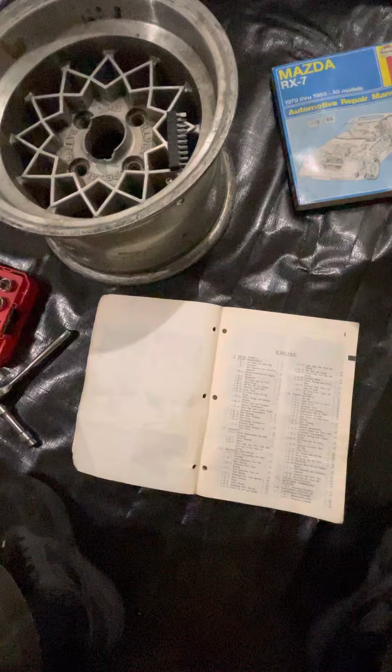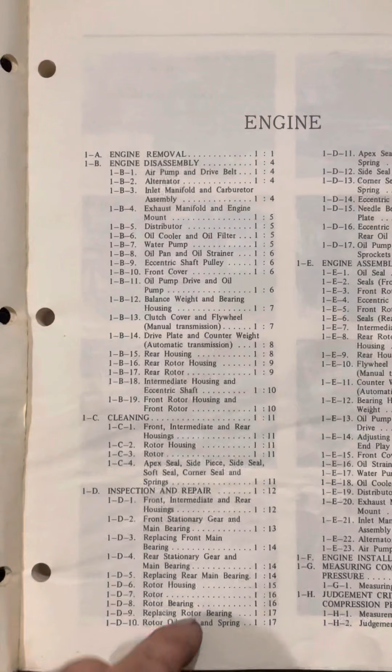I've got my RX7 '83 model, the actual '83 workshop manual from Mazda. Just doing this on a shitty ass iPhone. It gives you the two different things for engine removal.

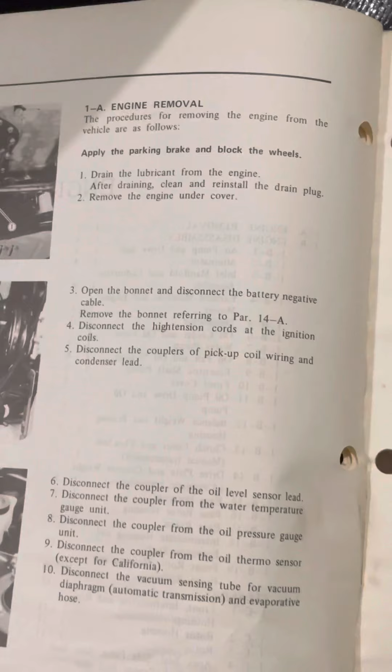Engine removal procedures: apply the parking brake, block the wheels, drain the lubricant from the engine. After draining, clean and reinstall the drain plug. Remove the engine undercover, which is the splash shield essentially.

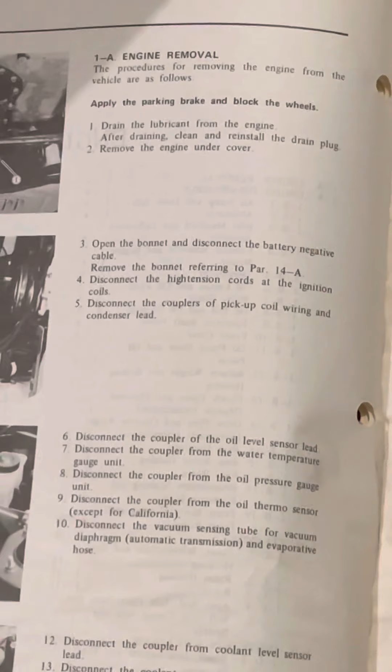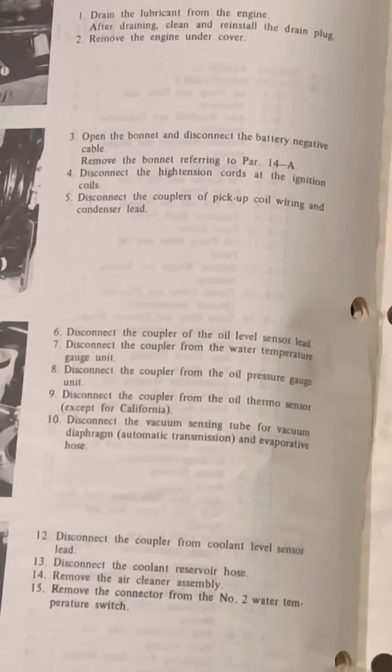Open the bonnet, which is the hood, and disconnect the battery negative cable. Remove the bonnet, referring to paragraph 14A. Disconnect the high tension cords at the ignition coils. Disconnect the coupler of the pickup coil wiring condenser lead. Disconnect the coupler of the oil level sensor.

Disconnect basically everything. And then I'll show you here the pictures, like that.

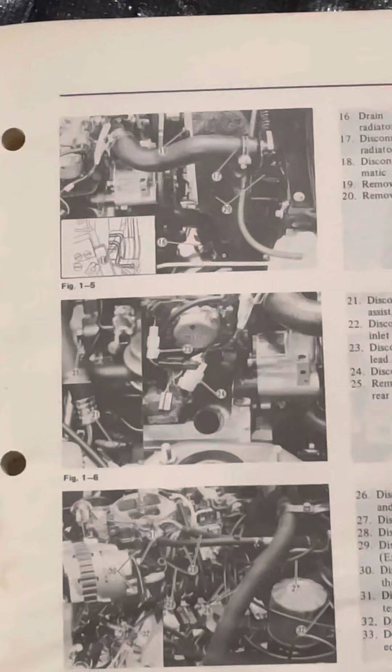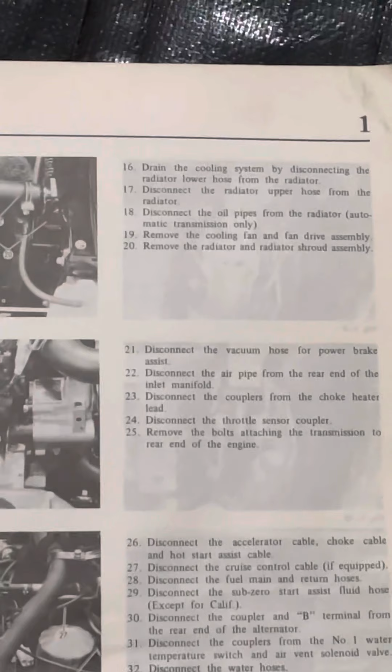Let's disconnect, demount the air conditioning compressor if equipped, jack up the vehicle and support it with stands, disconnect the wiring and remove the starting motor, remove the bolts attaching the transmission to the rear end of the engine.

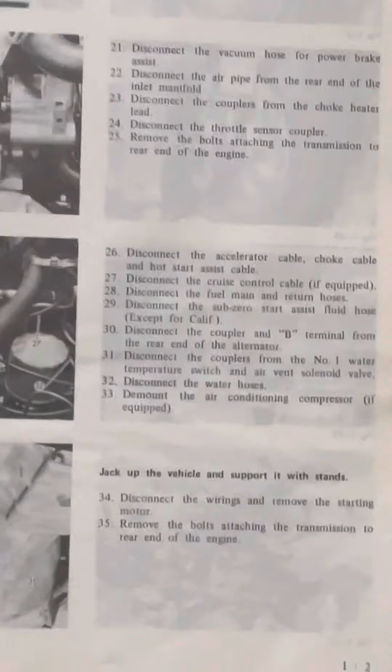And pretty much that's where I'm at with this. And it shows...

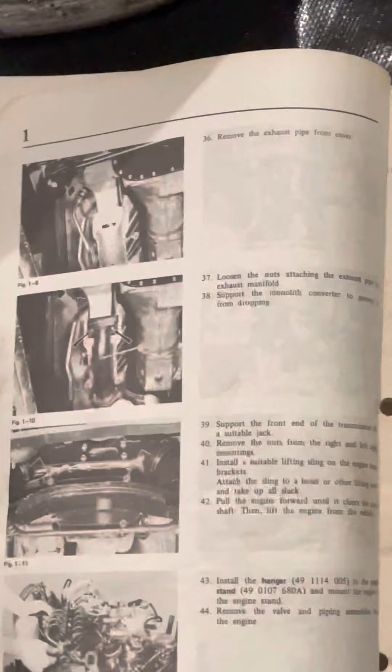Remove the exhaust pipe front cover. Oh, hold on. Loosen nuts. Support the front end of the transmission with a suitable jack.

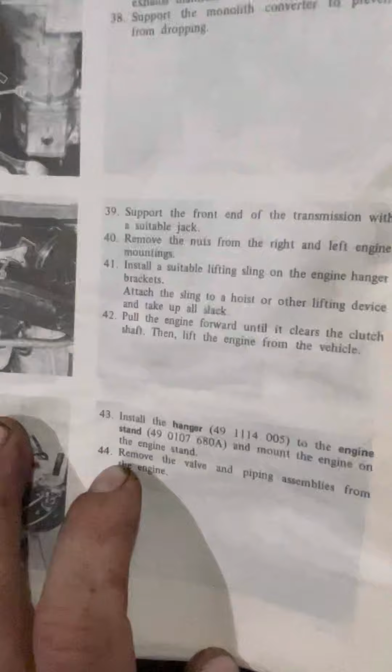Install the hanger to the engine stand. Giving you part numbers that don't mount this shit no more. And then mount the engine on the engine stand.

Remove the valve and piping assemblies from the engine. So basically your rat's nest.

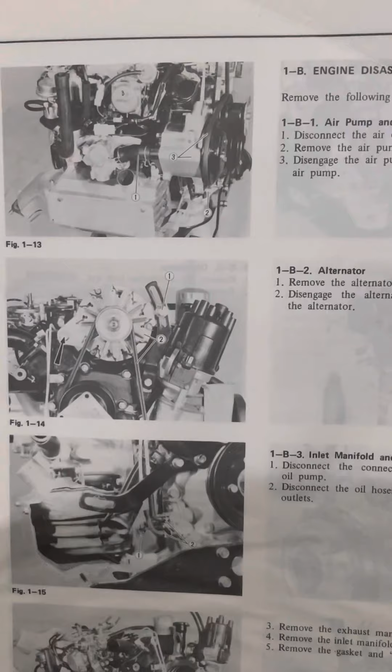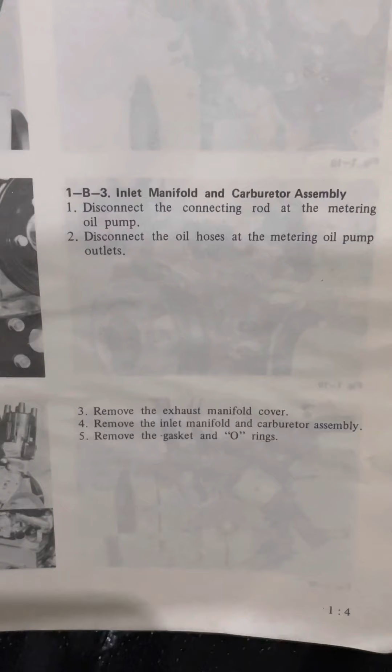Then your air pump, alternator, inlet manifold and carburetor assembly next. Remove the exhaust manifold cover, remove the inlet manifold and the carburetor assembly, remove the gasket and O-rings. Basically get all the shit hanging off the sides of it off, is what they're saying.

Exhaust manifold and engine mount. The distributor: remove the distributor lock nut, remove the distributor, that's pretty fucking easy.

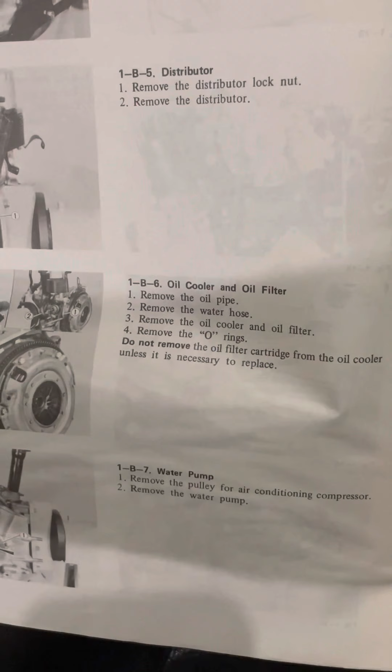Oil cooler and oil filter: remove the oil pipe, water hose, oil cooler and oil filters, remove the O-rings. Do not remove the oil filter cartridge from the oil cooler unless it's necessary to replace. Not a big deal.

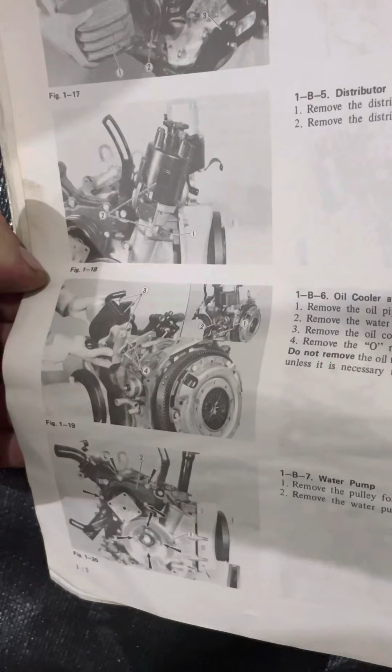Water pump: remove the pulley for air conditioning compressor, remove the water pump. This one assumes basically you're a competent mechanic. It says oil pan and oil strainer: remove the oil pan, remove the oil strainer and gasket.

To remove the oil pan, slowly drive the scraper, blah blah blah blah blah blah. Engine shaft, eccentric shaft pulley.

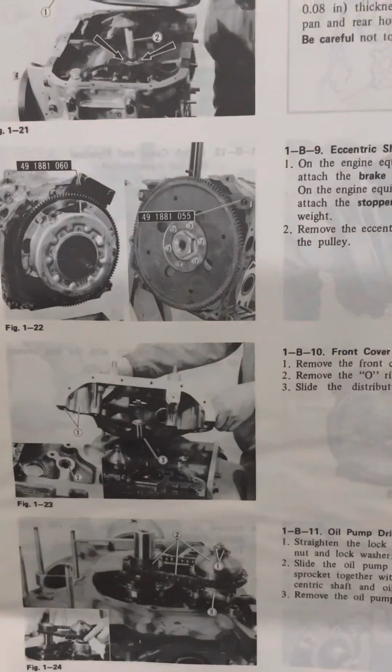You got to get a stopper for it. It shows you another way to stop it, because that's the flex plate version. The other one's a manual transmission. Then you remove the front cover.

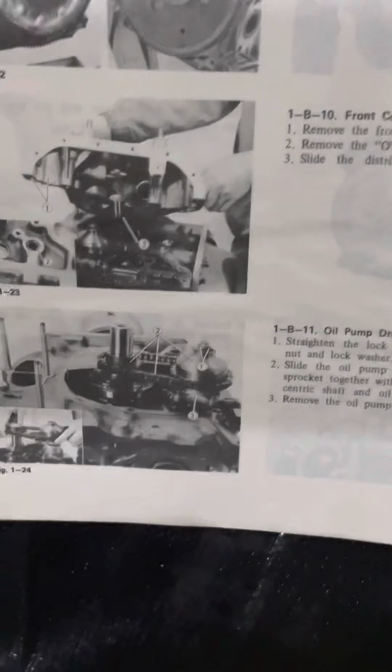So and so and so and so. Yep, I'm not gonna go through all this. I'll just kind of go through it with the video.

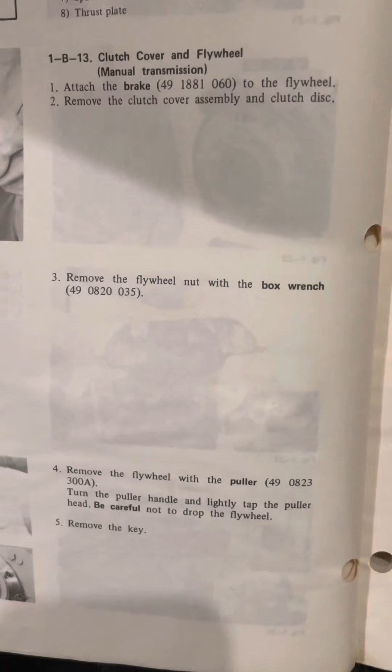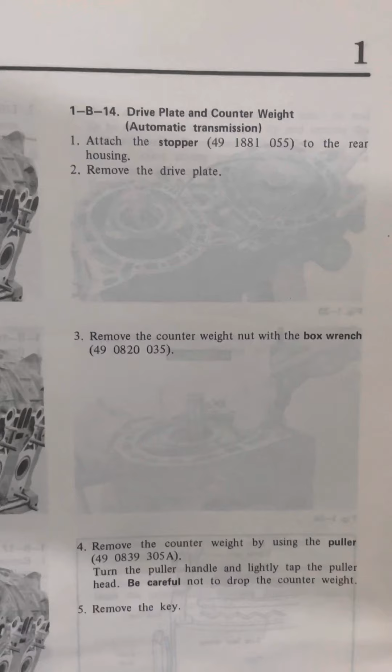If you want to pause, that way you can understand the manual if you're ever to do one of these yourself. It refers to part numbers that don't really exist anymore, because these are, you know, 40-year-old vehicles, before the internet was even around really.

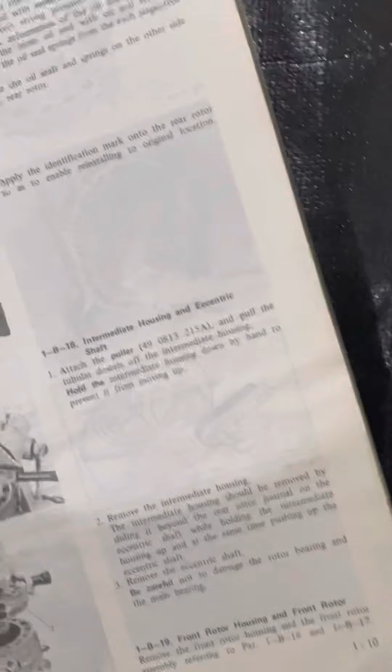Talking about rear counterweights, giving you the almighty pattern that you should follow. Then imagine nobody ever follows it to disassemble. I don't think it makes a difference, but I'm not an expert.

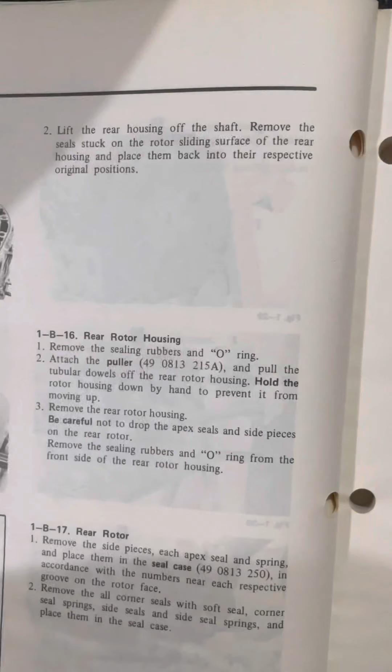Lift the rear housing off the shaft, remove the seals stuck on the rotor sliding surface of the rear housing, and replace them back onto the respective original positions. So remove the rear rotor housing, remove the sealing with the puller.

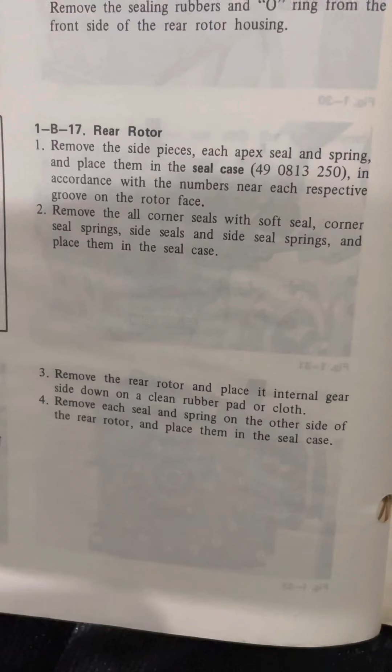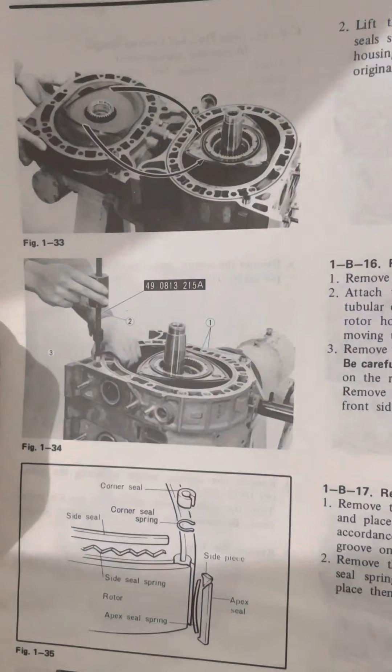Seal case, which we don't have that. See, that's a seal case, basically just a box. But you could make that up or make that somehow, figure it out.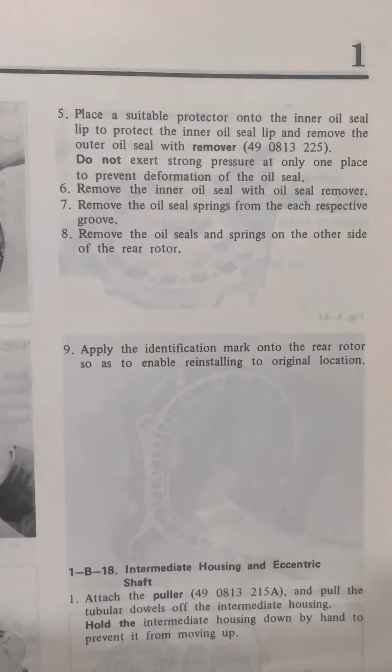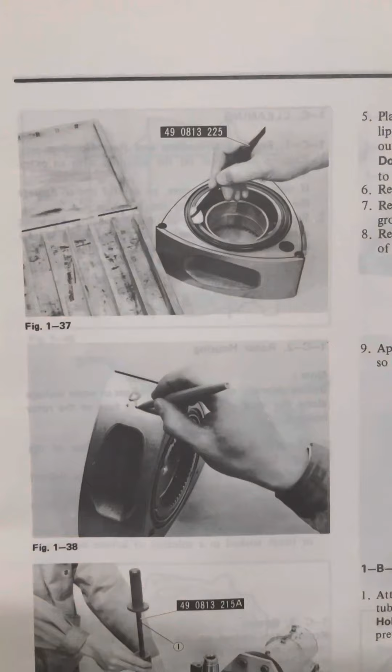Mark the rear and front.

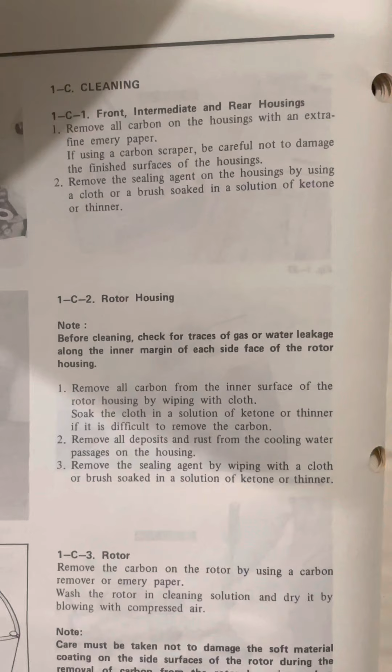Cleaning it for reassembly. Inspection and repair.

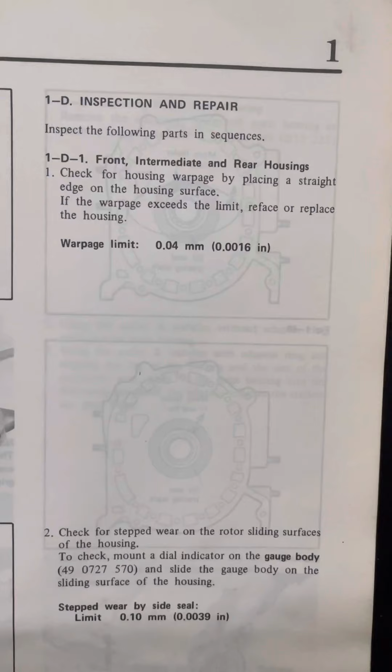Inspection and repair: inspect the following parts in sequence - front housing, rear housing, check housing for warpage, straight edge with the housing surface. If the warpage exceeds the limit, reface or replace the housing.

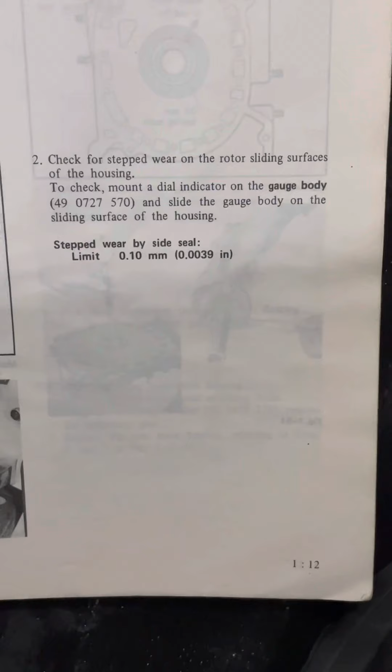Most likely you're going to reface. I don't think you're going to get a new housing, they're too expensive. Refacing is $150 or so. New rotor plates are like $200 at the bare minimum for used ones that still need refaced.

It's kind of telling you, showing you how it's done. Giving you a magnetic base to check the step wear.

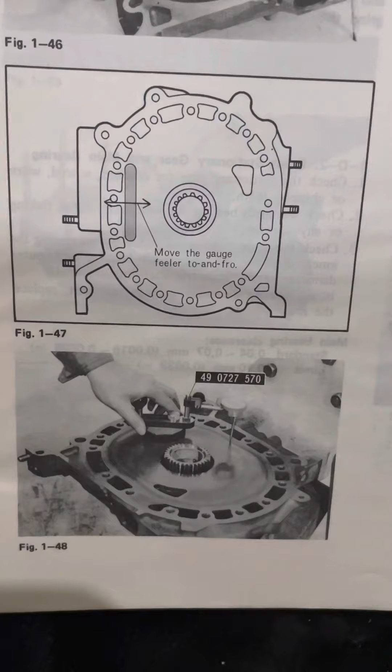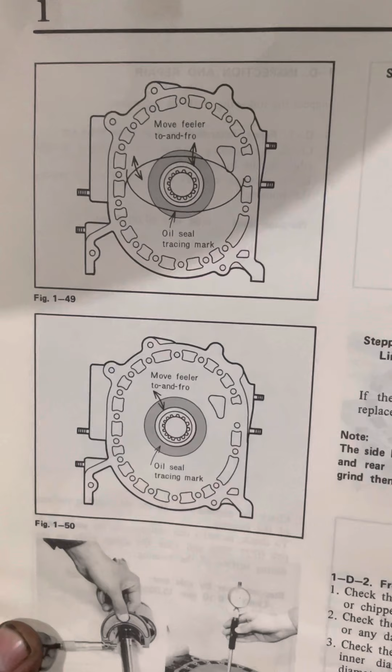I believe, yeah, stepped wear by side seal limit, 0.10 millimeter, or almost 4/1000ths of an inch. Let's see, 12, yep, 14. Showing you: move feeler to and fro, trying to just basically see how much wear this motor has.

Yeah, they're telling you how to strike it with a fucking hammer to reset it. That ain't gonna fucking work.

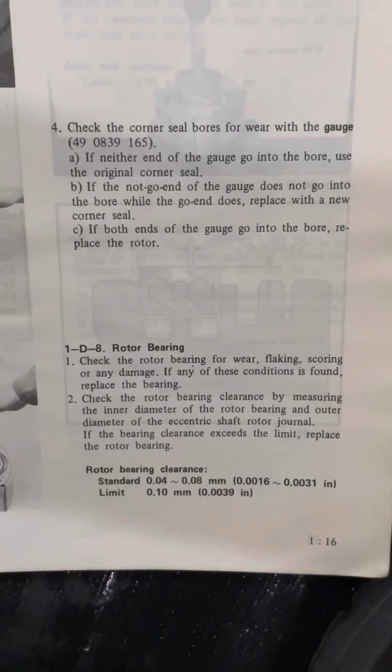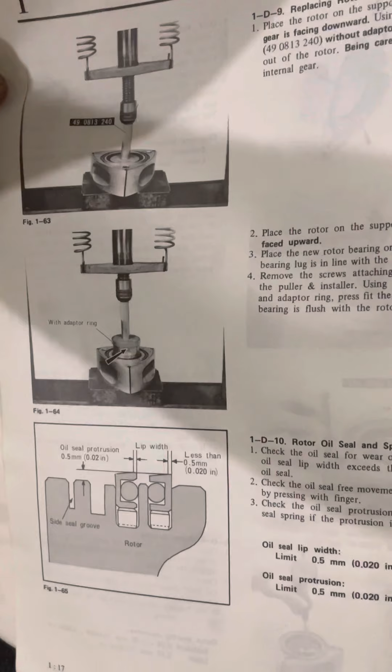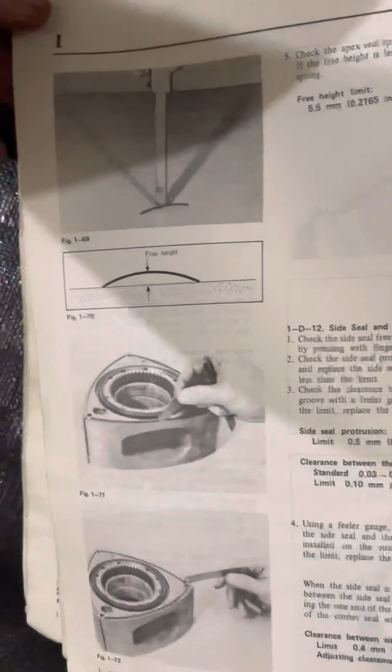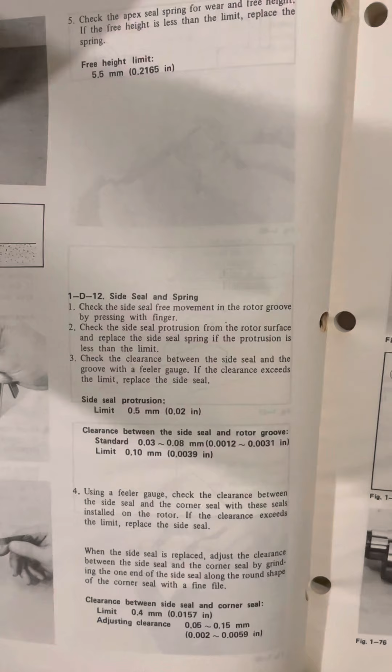Trying to make this video as quick as possible, but yet have the information out there for later. They're showing 1, 2, and 3 there. That's important because I think they refer to it.

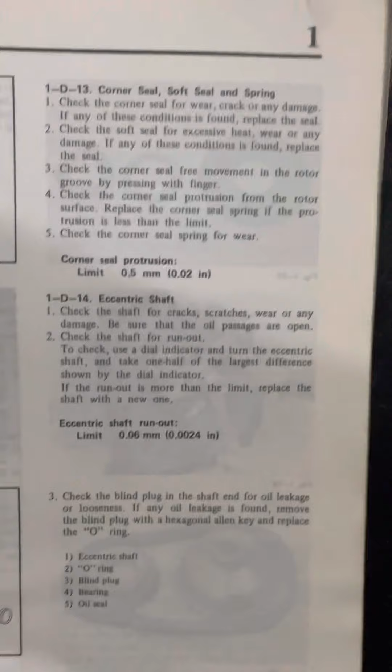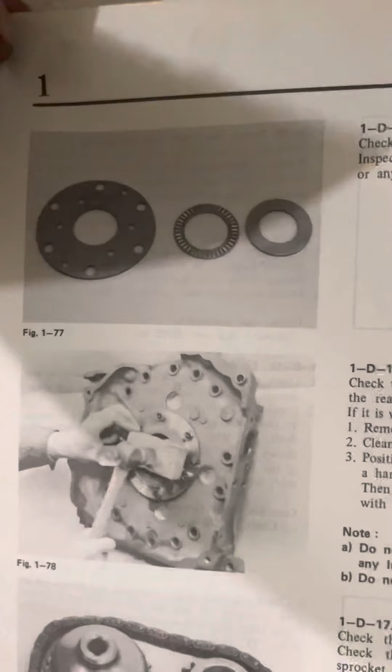And needle bearing and thrust plate, check it for damage or wear.

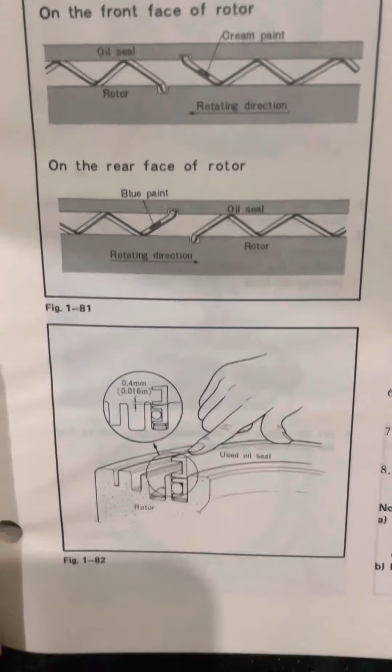We're talking about paint because they're using new parts, but we can't get new parts that easily. So this is engine assembly. I'm just gonna go over this quickly.

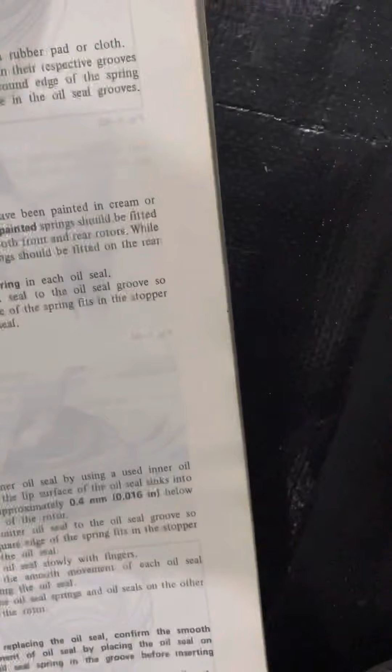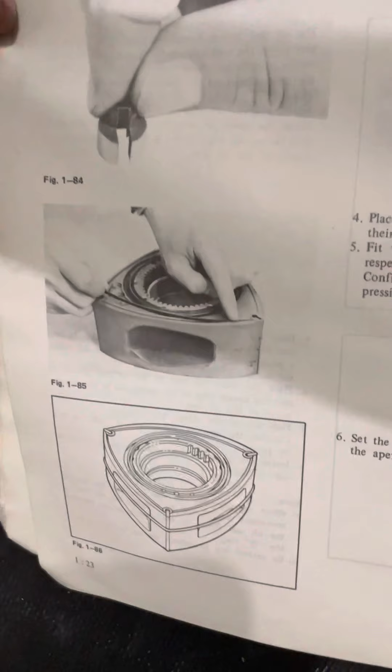Using a rubber band, it looks like.

Showing the apex seal in it. But this little break is right here, that's just so they don't have to draw the whole image. That's just showing that they didn't draw the middle part of it, just to save space.

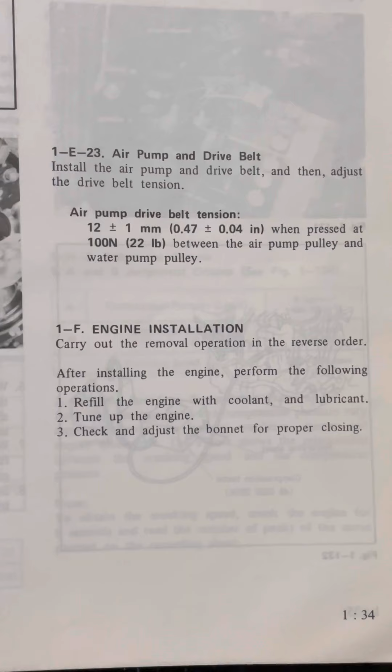Measuring compression, pressure, other shit.

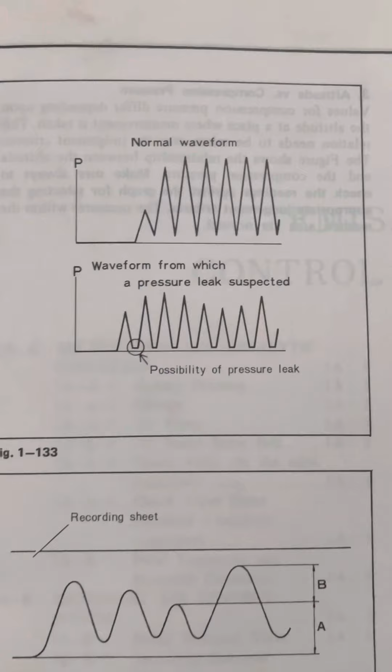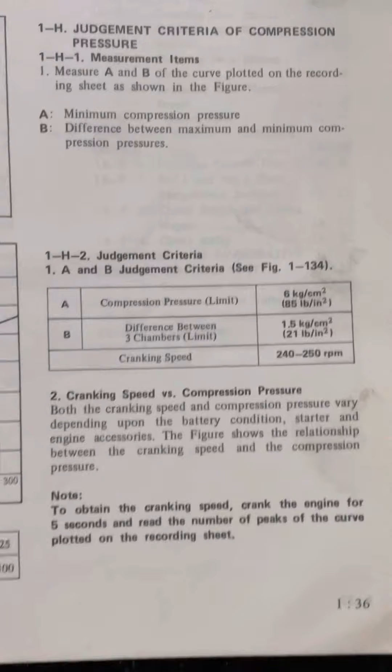Yeah, I'll go over pretty much this whole book eventually and publish information out so that way it's actually out there. I imagine there's not very many of these service manuals, and even if it doesn't get viewed by very many people on my channel or anybody at all, at least the information is out there if it ever gets recommended to people that need it.

I'll try my best to get it out there because this is information people desperately need, because this is what Mazda was saying that you need to do. What other people tell you to do is what other people tell you to do. All I know is I'm going to do it the best I can.